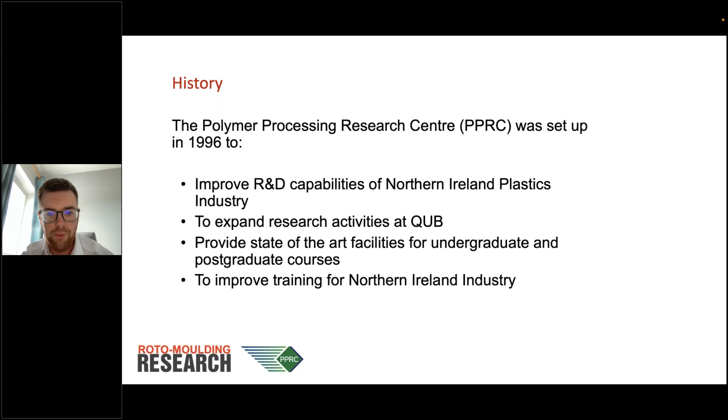We have 7 permanent core staff of engineers and researchers employed in the PPRC, and we can offer a range of training programs, consultancy and joint technology transfer programs where a student would be based in a company but would have access to the PPRC facilities to be able to transfer knowledge from the PPRC out into industry.

We're very good at creating desktop studies. Obviously, miniaturizing industrial scale processes is fairly handy for research purposes. It can take quite a while to do industrial scale process trials, although we do also have equipment for that, and I'm going to give you an idea of the equipment we have available. We have approximately £2 million worth of equipment within the PPRC, covering 400 meters squared of modern laboratories.

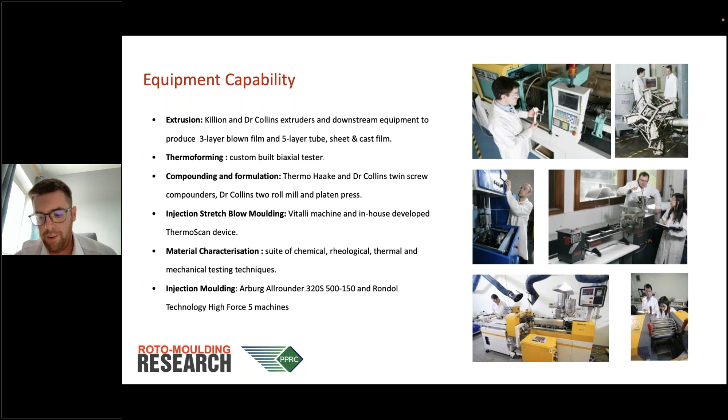This gives you an idea of some of the facilities we have. So we have expertise in extrusion, thermoforming, compounding, injection stretch blow molding, and then into material characterization and injection molding as well. In addition, we have rotational molding capability. Our lab is equipped with a ferry machine, which you can see a very artistic picture of to the right-hand side here.

The industry as a whole we see is moving towards direct electrical heating, and we have a Robomould robot system installed in our lab that I'm going to talk about in the presentation. We also have a Wedco grinding facility, which enables us to couple with the extrusion processes to be able to look at recycled material and its use in rotational molding.

We can do a lot of particle analysis, so we have sieve shakers and polymer melt imaging systems. In addition, we have equipment for monitoring temperature, both on the electronically heated molds and in the gas-powered systems as well.

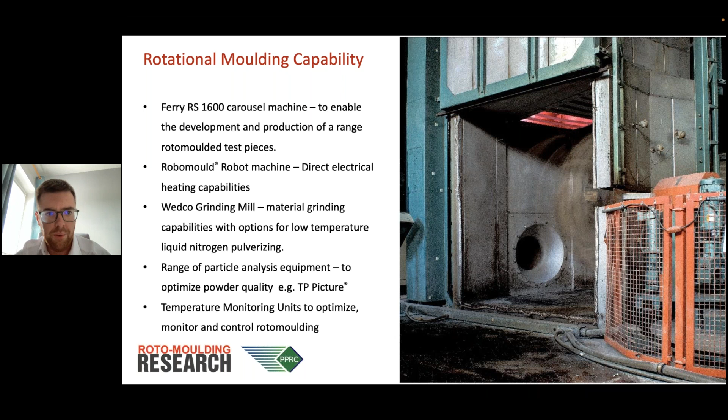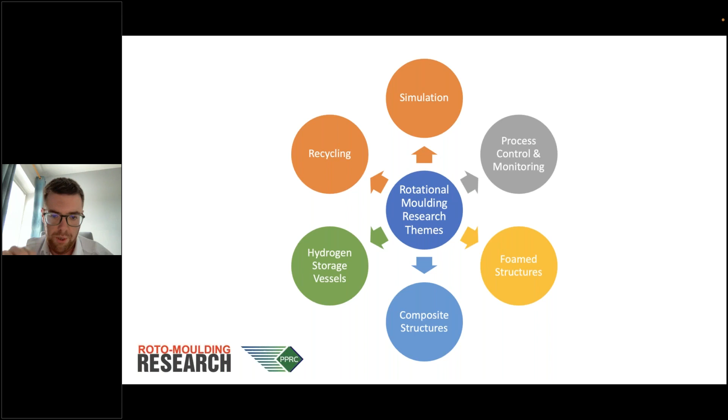Rotational molding within Queen's stems from quite a few different research themes, and a lot of these themes overlap with each other, so I'm going to try and summarize the main categories. My involvement has mainly been on foam structures and in process control and monitoring, but I'm going to also talk about my colleagues' research in composite structures, simulation, and recycling.

To begin with, we're going to look at the foam structures. For my PhD research, I had an aim to investigate and optimize large-scale, lightweight, multi-layer structures. These were targeted at offshore wave energy generation devices, of which there's an example on the right-hand side of this slide, and that could either be in the form of skin-foam or skin-foam-skin.

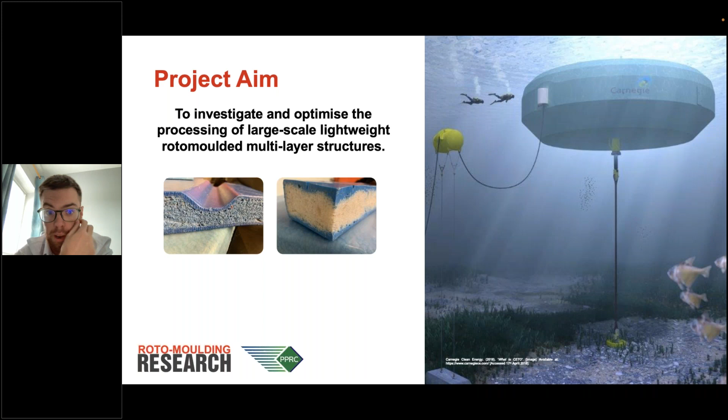One of the problems I identified early on in the project was that in order to optimize these foam structures, it would be incredibly difficult to do a trial and error type exercise using our industrial scale equipment, our roto speed machine. So instead, what I started to explore was this miniaturization, looking at either small scale or offline experimentation techniques. The limitations of using full-scale equipment are that you're going to use large amounts of material, and it can take quite a while to produce even just a foam-only molding.

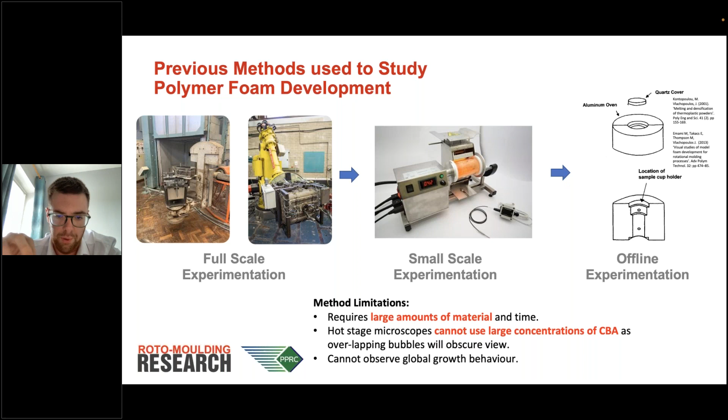On the other hand, with hot stage microscope systems, because you're imaging the polymer melt as the foam grows, as the bubbles grow in size, the microscope at a certain point, when the bubbles start to merge together, doesn't really give you that much information. And that means you can't observe the global growth behavior of your foam.

So I went down the path of trying to observe this global foam behavior. You can see the iterations I went through to get to my final experimental setup. We started with an oil bath, which moved into a glass oil bath, enabling me to image through the cross section to get the foam height change. That was then taken a step further to a more scientific, digitally controlled setup, where I was able to accurately maintain the temperature of the oil bath.

The advantages of this were that in my particular case, it only needed 5 grams of material instead of probably around 2 to 3 kilos of material for a small cube mold on the ferry machine. It also meant you could scale up the experiment so that you could make multiple samples under the same heating conditions if you wanted to. And because it was digitally controlled, you were able to create a comparison between the industrial scale equipment and my experiment.

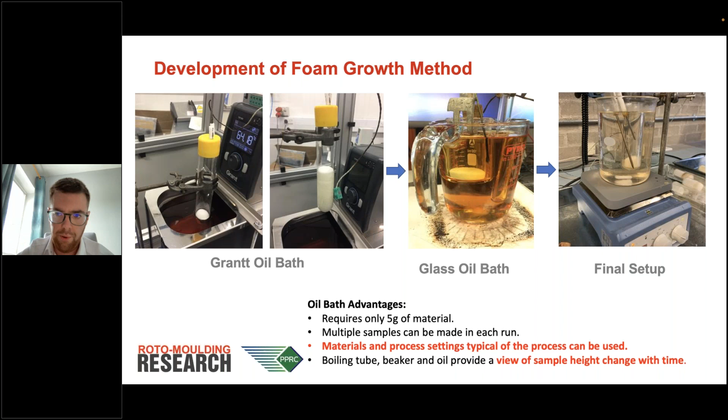Just briefly, because this video isn't going to show very well - what I have is 2 oil baths. One is providing the heating, and one is providing a controlled cooling rate. This is the view that the camera sees. The test tube is lowered into the heating side, and over a period of time, the polymer starts to compact as it melts, and then eventually starts to expand as the blowing agent activates.

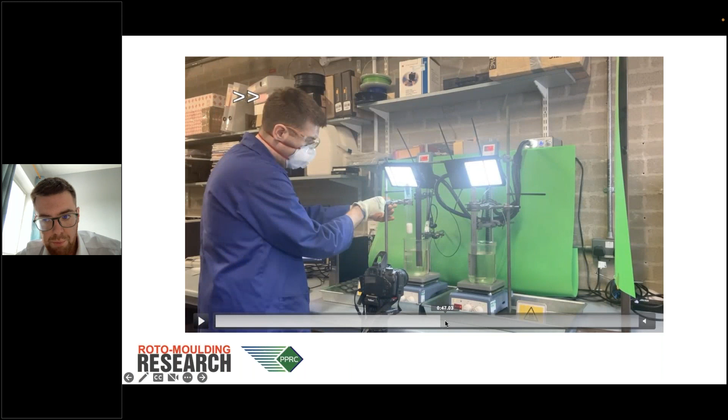In this image here, that then gets moved across to the right-hand side, and you can see the temperature reduction of the melt in that image on this side of the trace.

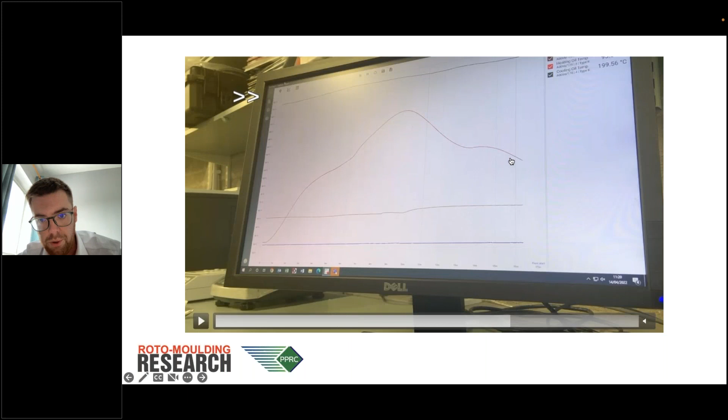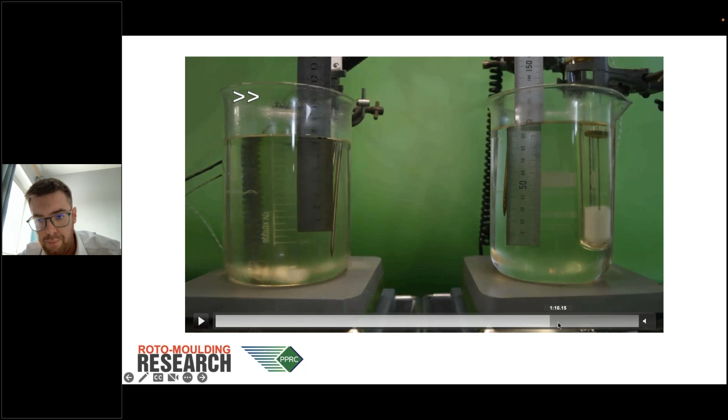This then gives you the shrinkage of the foam during the cooling process. From the images captured, roughly one every 20 seconds was sufficient to capture the data I needed. The images were imported into software called MIPAR, which automatically cropped the region of interest, the red box in each image, and exported the height of the box in the y-axis, giving the foam height change.

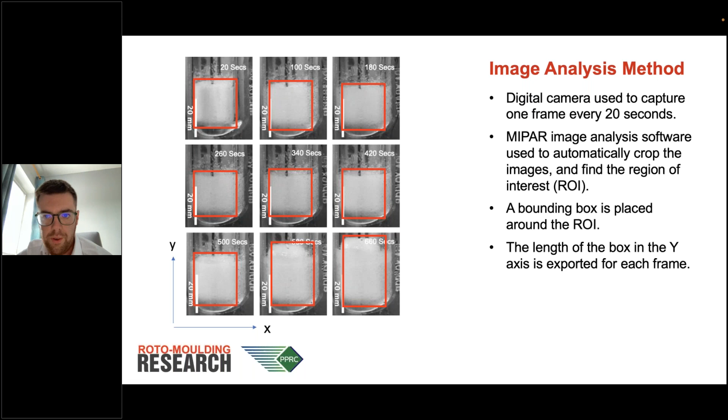I've got a couple of examples to demonstrate what that shows. This first one is the effect of chemical blowing agent concentration, a fairly standard thing to adjust to get a thicker foam. You can see on the graph there's barely any change during the first 5 minutes. Towards 10 minutes there's a dramatic increase in the foam height, and increasing the percentage of blowing agent gives you an increase in the foam height.

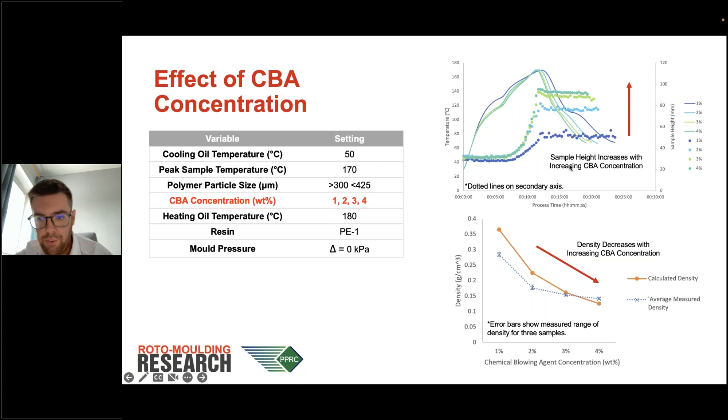Interestingly, it allows you to experiment with things you wouldn't ordinarily be able to at an industrial scale without significant effort. Here I'm showing the effect of polymer particle size on the foam height produced. At 425 to 500 microns, you get a foam down here, but at 90 to 106 microns, a much finer particle size, you get a sharp increase in foam height, and equally a reduction in the foam density produced. That might suggest a finer particle size produces a more optimum foam - smaller bubbles, and more of them.

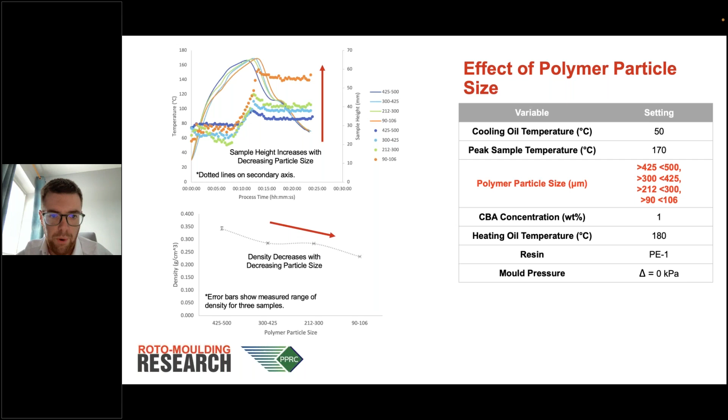At the same time, it became obvious there was a relationship between the sintering and densification behavior and the bubbles trapped within the polymer melt itself. So I developed an experiment where I have a glass plate and a little jig to put the polymer powder into.

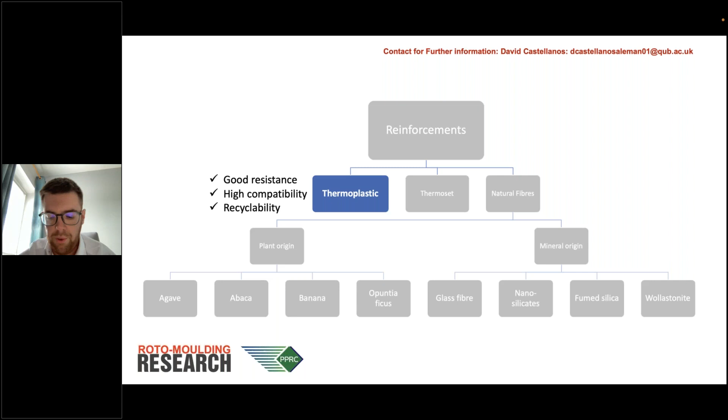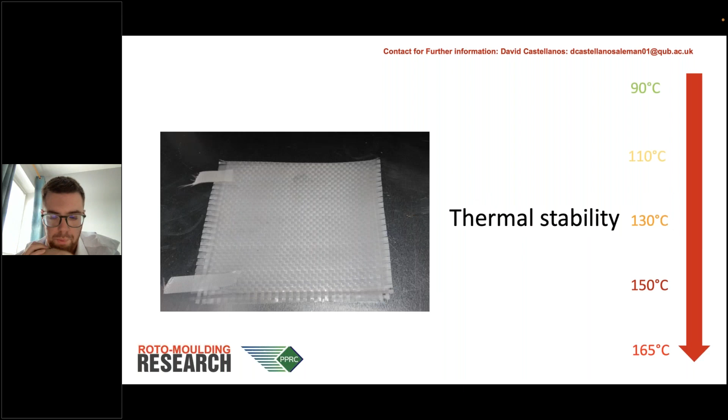That's a typical image of a composite mat that he would have been looking at, and the question he was trying to answer was: are they suitable for rotational molding? The way he went about identifying this was doing some characterization. One of the first experiments was to put this inside an oven and incrementally increase the temperature, taking an image of the composite plate to understand how it changed at temperature.

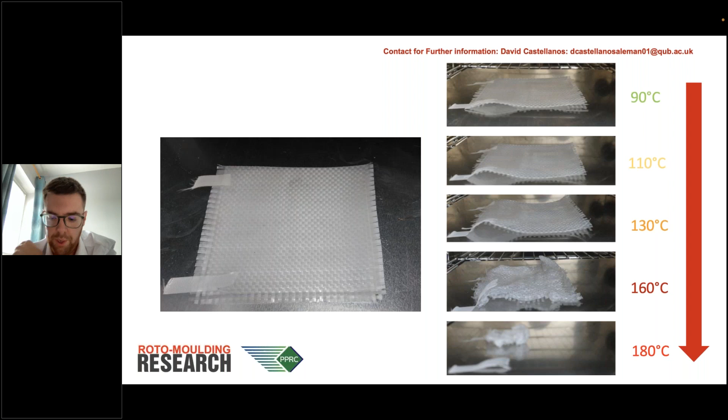From that, he selected a number of candidates that looked suitable, and he then placed them manually into a rotationally molded polymer melt by opening the mold during the molding cycle. He removed it from the oven, took the mold apart, placed the fiber into the polymer melt, and returned it back into the oven. You can see there are variable results with doing that because of the manual placement - in some cases it doesn't fully get embedded within the polyethylene, and in other areas it ends up being deeper. So it's not a very controllable process.

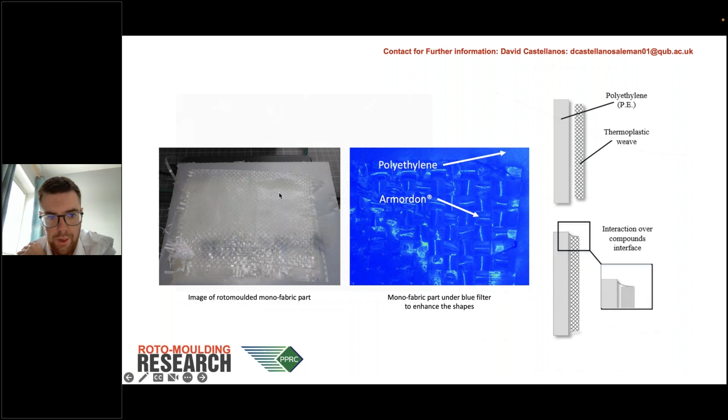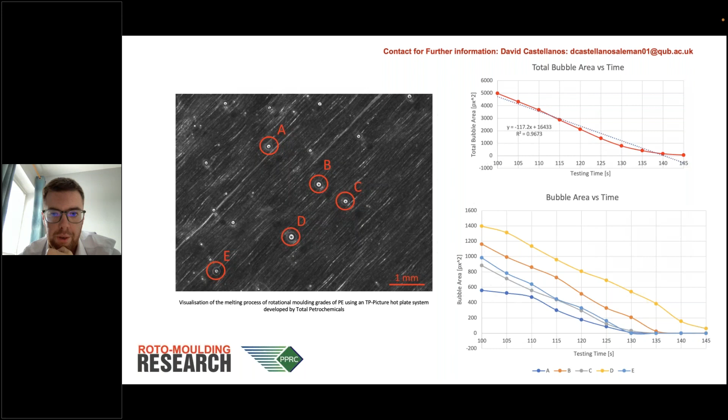There was some work involved in trying to optimize that to make sure the pinholes were removed during the cycle. The other thing he was looking at was trying to understand how the polymer was absorbed into the fiber itself. This process is known as a wetting process, and you want to encourage it to get the fibers well embedded within the polyethylene matrix itself.

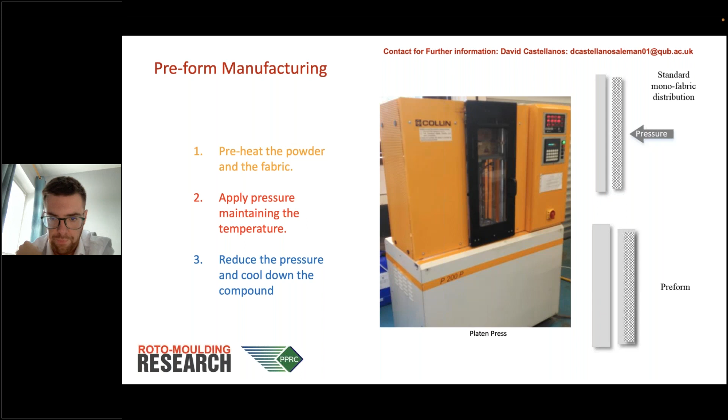One of the conclusions he came to after doing all of that process was that it's actually easier to produce preforms by compression molding the composite into a polyethylene bed first. This is an example of what that looks like - you've got the polyethylene matrix itself, which is well compressed within the composite material itself.

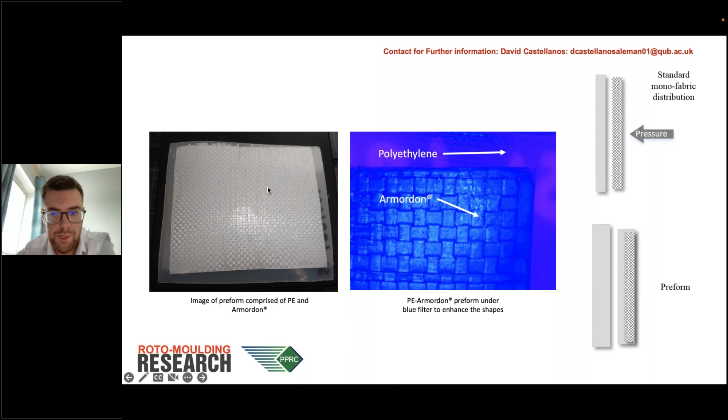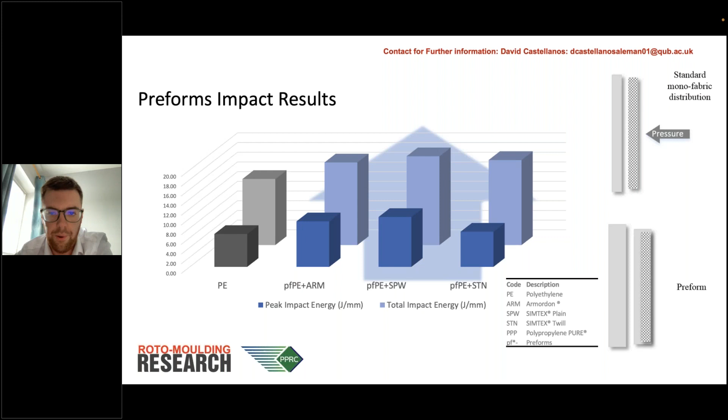He then went through a series of iterations to try and perfect which material gave the better mechanical properties. In most cases, he was finding that by placing that material into a rotationally molded part as a preform, he was getting consistent mechanical performance improvements.

We also have another colleague, Jitendra Seregar, who's working on the rotational molding simulation side of things. His research interest has moved into the effects of shrinkage and warpage and how we model that.

Shrinkage and warpage is affected by the uneven cooling of the part, either from the external or internal face, depending on whether you're doing external or internal water cooling, or air cooling. Depending on what direction the cooling rate is moving in, you get a compressive force on the part, which then creates this air gap.

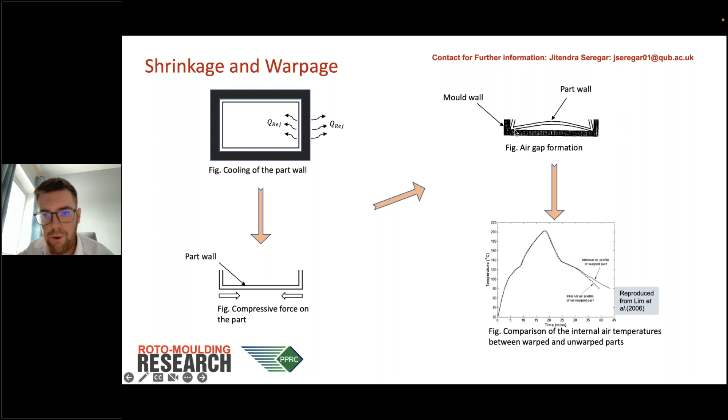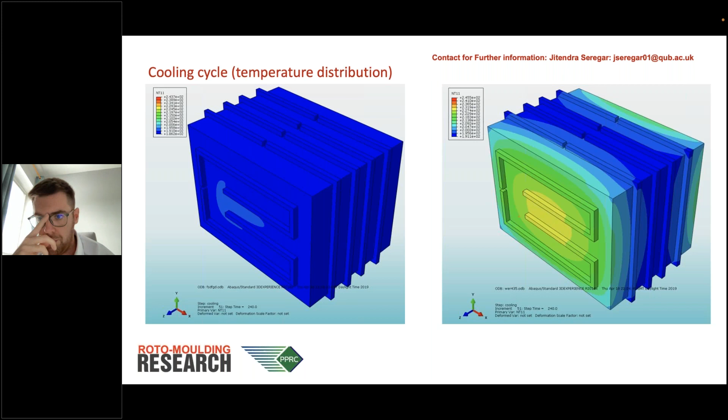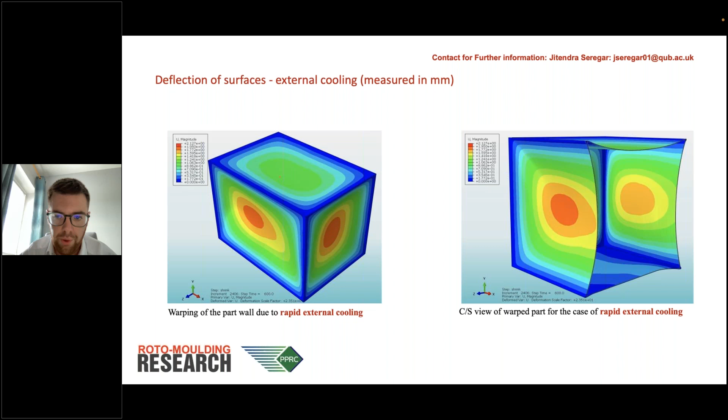He is able to simulate the temperature change across the mold, which can then be translated into a warpage plot of these parts. In this case, what you're seeing is a rapid external cooling effect, which was a spray of water onto the surface, and he's able to plot the displacement of the parts - in this case he's gotten a 2.12 millimeter deflection.

But equally, you can simulate the effects of rapid internal cooling, which is something extremely beneficial to rotational molding. From a research perspective, it could really cut down on cycle times, but from an industrial perspective, it's incredibly difficult to implement internal water cooling and control it effectively.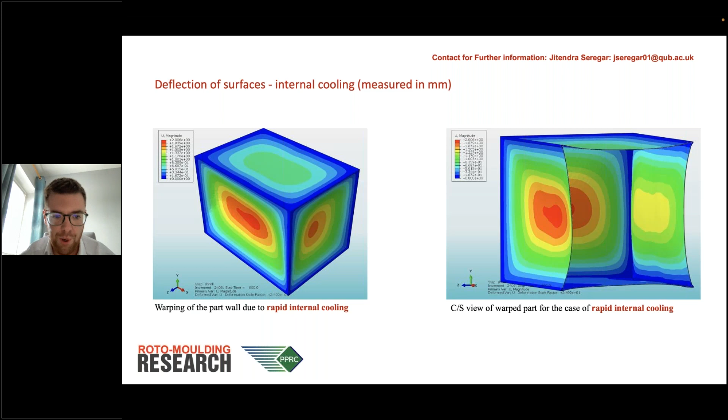So this research, we hope, is going to progress towards being able to perhaps balance an internal and external water cooling process and be able to optimize that displacement and minimize the warpage of the parts.

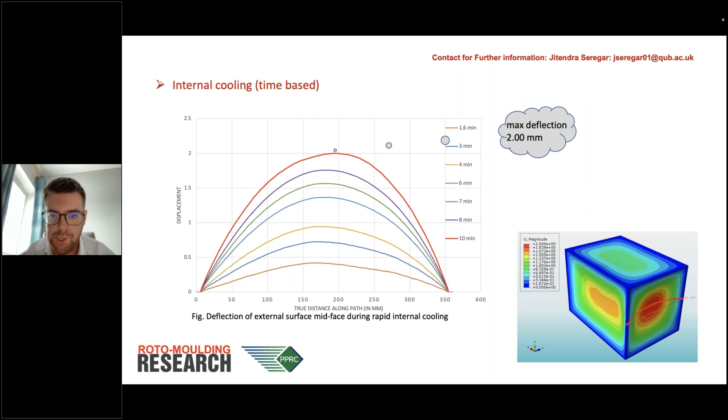Finally, I want to discuss some of the future rotational molding technologies developed at Queen's, which are more collaborative in nature. We all chip in together to make use of our AMS robot, an electronically heated mold. There's a box on the side of the mold with an industrial PC mounted within it, and we can get wireless access to that PC anywhere in the world. We use that for temperature monitoring, taking images, and we can also do ultrasound.

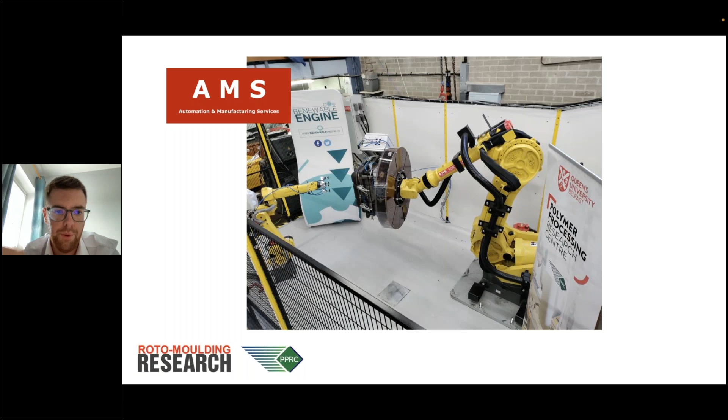In David's work, he's interested in trying to monitor the fibers within a molding. He developed a camera system that is able to monitor the opposite wall from the camera, and this is what you see during that process.

This image is just a standard rotational molding cycle, and you can just about make out the bubbles on the surface of that molding. Then into the shrinkage and warpage phase, you start to get a lot of reflection from the unevenness of the polymer melt as it starts to solidify.

Taking that a step further, you then put chopped fibers into the same molding. At the early stages, there are fibers passing by the camera but not sticking to the mold because it's not hot enough yet. But at a certain point, layer by layer, the polymer starts to stick to the mold, and you can see that some fibers start to get captured within that polymer melt. Iteratively, you get a layer after layer buildup of polymer with chopped fiber.

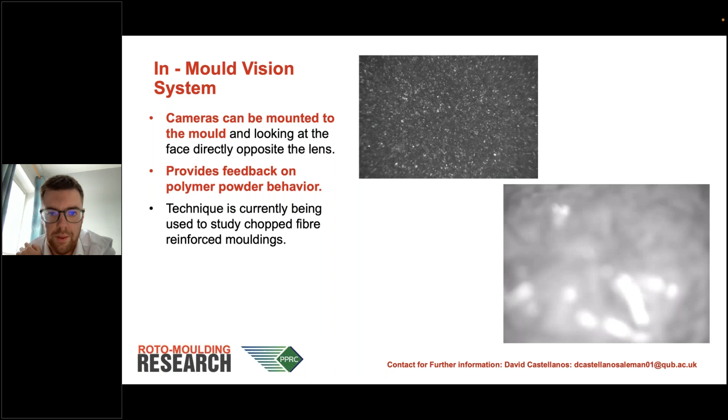At the same time, I had developed a system for monitoring vacuum foamed samples—pulling a vacuum on a polymer melt that already has bubbles in it to create larger bubbles. The same idea applies here: you get this polymer melt that builds up on the wall, and at this moment you can pull a vacuum and see those bubbles start to increase in size.

This happens fairly slowly because of the size of the mold and the size of the vacuum line we were using on this machine. Then it moves into the solidification phase.

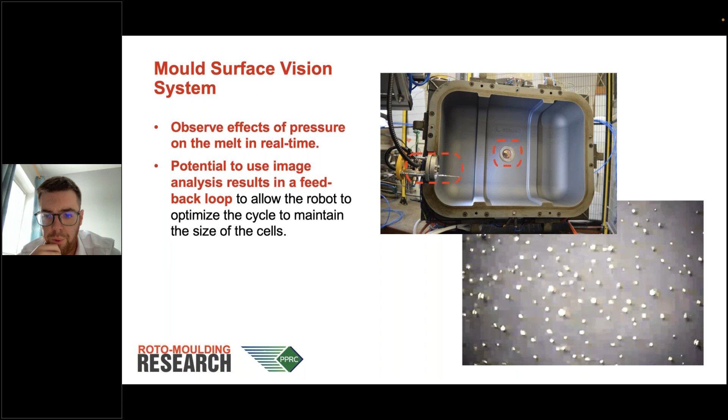One of the nice things is that, unlike using a chemical blowing agent process, you could program the robot so that you have an input window specifying what average bubble size you want in your molding. You could put in 100 microns, and it would control the pressure line to make sure the average bubble size within the analyzed image was within that region—something you just wouldn't be able to do with a chemical blowing agent system.

In addition, another student, Hangtian Zhou, is looking at robot motion. One benefit of using a robot system is the possibility to do freestyle motions, making use of all 6 axes of the robot. At the moment, I think we're using 2 axes, maybe 3 sometimes. His research is trying to answer what the benefits are from doing that.

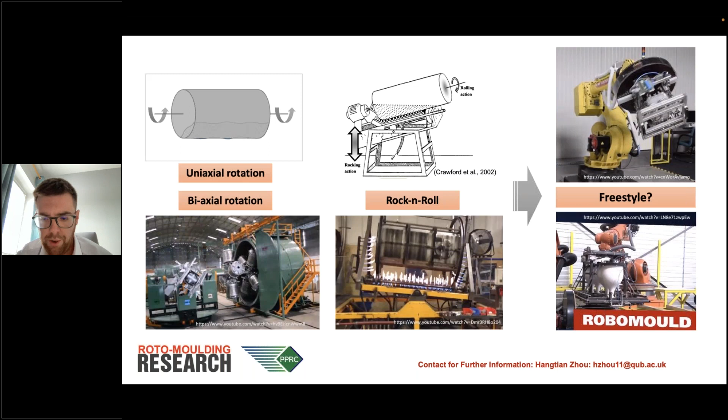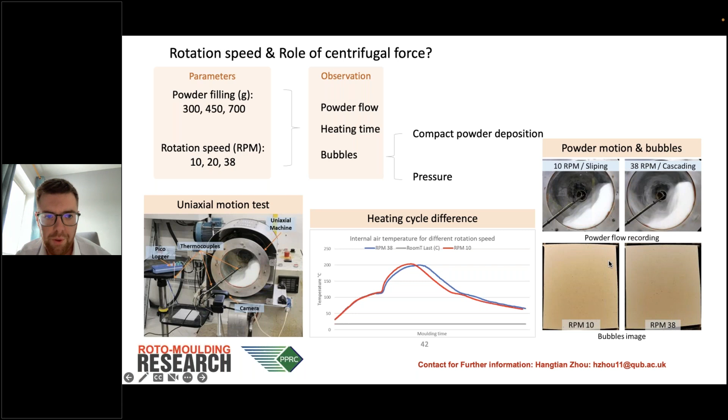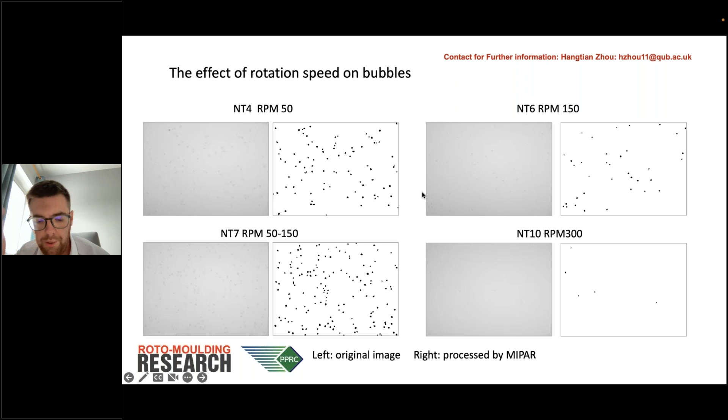At the same time, he's also looking at how speed affects the moldings. He's using a uniaxial machine to simplify his experiments, comparing, in this case, 10 RPM and 38 RPM, the speed of rotation of the mold itself. His early work has indicated that rotation speed does have an effect on bubbles—increasing from 50 to 300 rotations per minute dramatically reduces the amount of bubbles present in the mold, taken from an image at the same point in the cycle.

And then lastly, I want to discuss the use of ultrasound in rotational molding. Perhaps some of you are aware that ultrasound can be used for monitoring polymer thickness of molded products that you've demolded and have been sitting around on the factory floor for a while. What I was interested in, though, was how we can use ultrasound to monitor what the polymer is doing inside the mold during the rotational molding cycle.

Over the 4 years that I was doing my PhD, I was looking at applying an ultrasound transducer, this T1 signal, onto the wall of a mold, which is M1 to M3, because you get returning echoes from the sound wave produced from the transducer. There's also an element of the sound that passes through the polymer and reflects back again.

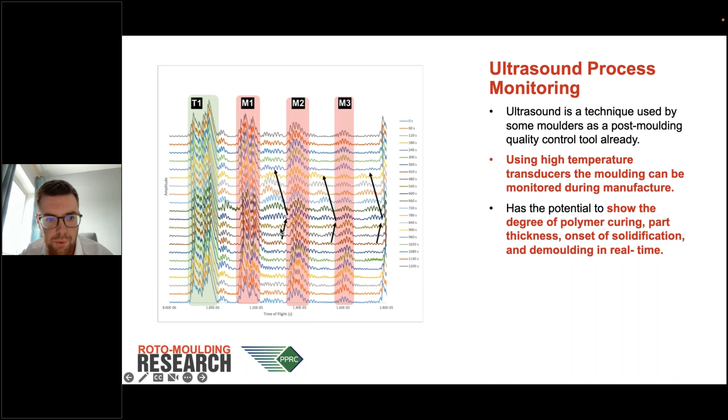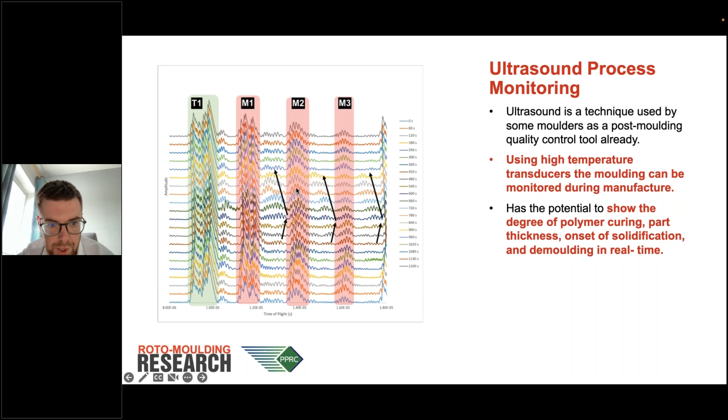But more interestingly than that, you can also monitor the amplitude of these signals, the strength of the signal that is returned back to the transducer. So if you imagine taking the peak of this signal right here and plotting how that changes between all of these curves, what you get is a graph that looks like this.

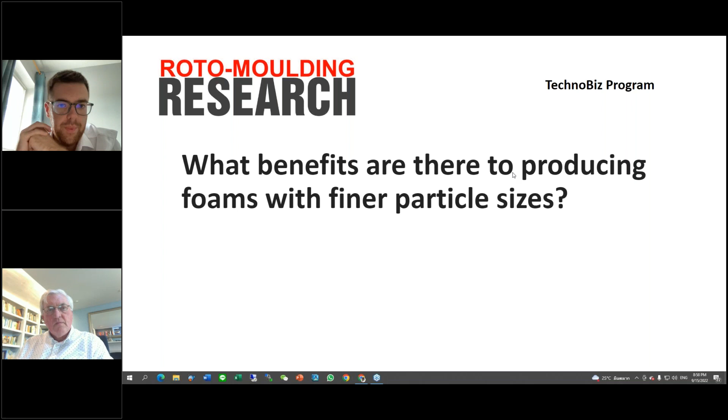The next question: if increasing the axis speed can remove pinholes quicker, what speeds might be possible with a robotically controlled mold? So I asked Hang-Tian this morning about this, and he says our robot could theoretically, if you wanted, rotate the mold at 60 rotations per minute. Now, I don't know whether the school's health and safety team would ever want to see the mold rotating at that speed, so there may be an upper limit, but theoretically 60 rotations per minute would be achievable on the robot we have.

I think on that question though, I don't think - I might be wrong - but my understanding is it's not the rotation speed that's removing the pinholes or air bubbles. It's the fact that by using a higher rotation speed, you get less air bubbles in the first place. I have a funny feeling he was going down the route of spinning - one of the pictures was at 300 rotations per minute, and he was starting to take into account centrifugal or centripetal forces. I think that's where his thinking was going, but the lower speeds, and indeed 60 rotations per minute, is nowhere near 300.

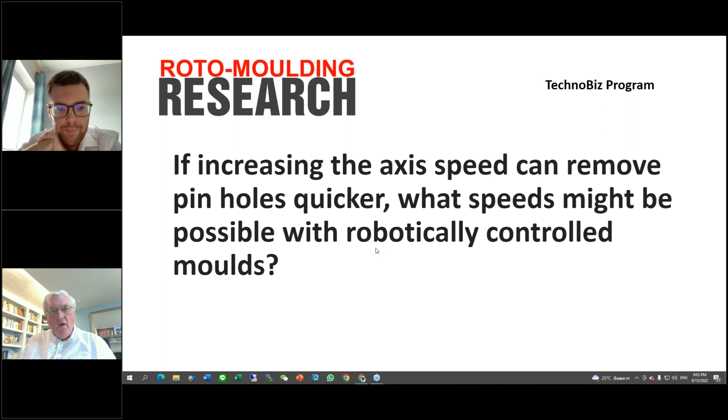Okay. Do we have another question? Oh, hang on. Yes, yeah, we do.

So this question is, do you think the relationship between rotations per minute, axis speed, and void reduction can be used to reduce heating cycle? Does this research assess to what extent gas consumption and cycle time could be reduced due to the phenomena observed?

The simple answer is no, it doesn't assess the gas consumption and cycle time reduction. That's actually particularly relevant though in this case, because if you're putting more energy into your robot to spin it faster, it's obviously got to have some benefit, because if the cycle time remains the same or you're using more gas as a result of it, then it obviously negates doing it in the first place. So again, that's something I will feed back to Hang-Tian as a topic he needs to explore.

Did that answer the question in relationship? I think that answers that question. Yeah. Are there any more questions?

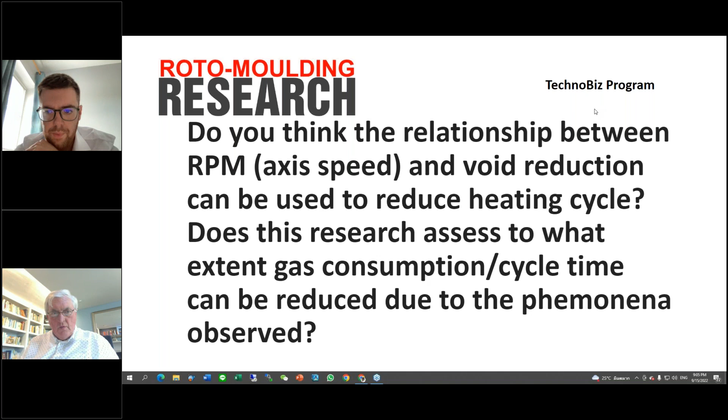So the next question is, how were the PE foams prepared? Mainly by dry blending, that's correct. They were all dry blended. The Turbo Blender has a 20 kilo minimum payload on it, and I was only using 5 grams of material, so it didn't make sense to go to a turbo blending process.

And you didn't try any compounded materials, where the blowing agent has been compounded in? No, I didn't. Do you think that might make any difference? It would be interesting to try it, because it may well help with this particle size problem. That could be another avenue of negating having to use finer particle sizes.

Generally, if you're trying to build up a big, thick layer of foam, compounded foams tend to work a lot better than dry blended ones, unless you're using very low temperature ones, which makes the processing difficult. But for some reason, the lower the temperature of the blowing agent trigger, the easier it seems to be to dry blend. I don't know why that is, that's just from my practical experience, but you seem to get quite good results with low temperature blowing agents dry blending. As you move to the higher temperature blowing agents, such as the 170s, 180s, or whatever, then you get better results from compounded materials. But again, that's my experience, and it's probably slightly outdated now, because I haven't actually been doing this for the last 7 or 8 years.